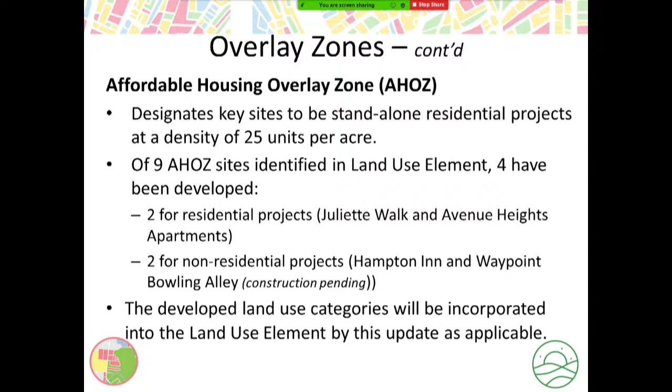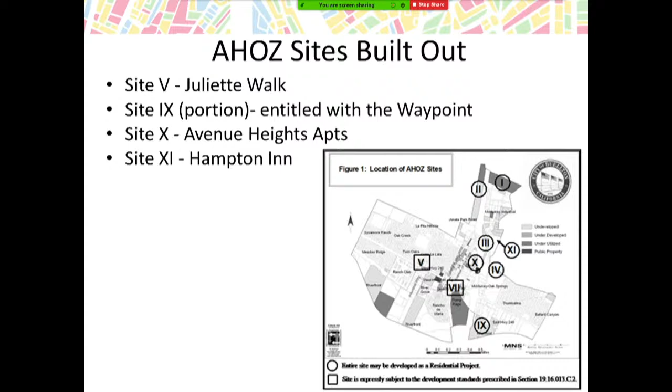Next slide, please. This is just a visual that shows where the AHOZ sites that were built out are, and where the others are throughout the city. And we can just move on to the next slide.

So we will be taking the existing land uses that are shown in the current land use element, updating them with all the items that I mentioned in the previous slides, and creating an updated existing conditions scenario, which will be the baseline scenario to use as part of this land use element update.

We will also be looking at 2 additional scenarios for the alternatives, for the environmental analysis and also for planning purposes. We will get into this in more detail later in the presentation, but I wanted to mention these scenarios so that when you hear us talking about scenario 1, scenario 2, scenario 3, you'll know what we're referring to.

So scenario 2, we will be looking at a 10-year build out. We will be looking at the desired uses we'd like to see during that period, any assumptions we're making on the densities that will be built out, and opportunities that exist for building out during that period of time.

And scenario 3 is actually what we're calling a circulation and land planning hybrid. It's an idea, partially a vision and partially a strategy for addressing some of the issues we're all very familiar with in the city, stemming a lot from traffic and circulation. We will be discussing that during the circulation element presentation.

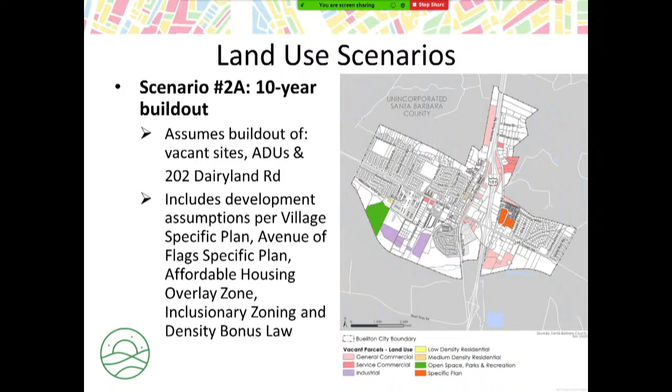So all of these considerations we felt were necessary in getting an accurate picture of the maximum development potential that could take place in order to plan adequately for circulation.

So in these next three slides, you'll see the vast majority of our vacant parcels are zoned general commercial, service commercial, or industrial, and then there's the Williamson property as well. There's approximately 114 acres of vacant land in the city.

On this slide, we see all the general commercial parcels, which make up 43% of the vacant parcels, shown in pink here. This zoning designation allows for commercial retail, wholesale, and office uses, as well as secondary residential and industrial mixed use. Most of these lots are AHOZ, as you see them labeled, meaning they could be developed entirely as residential.

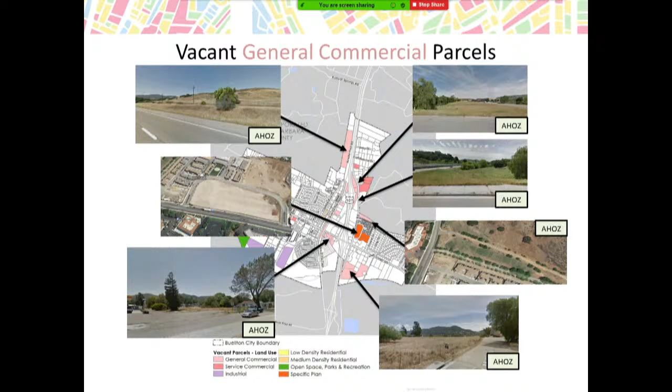The few vacant parcels that you see here zoned service commercial are in the darker pink, and this is about 11 acres. These could facilitate heavier commercial and light industrial uses, like furniture stores, car sales, ranch supply stores, and then again residential and industrial mixed use developments.

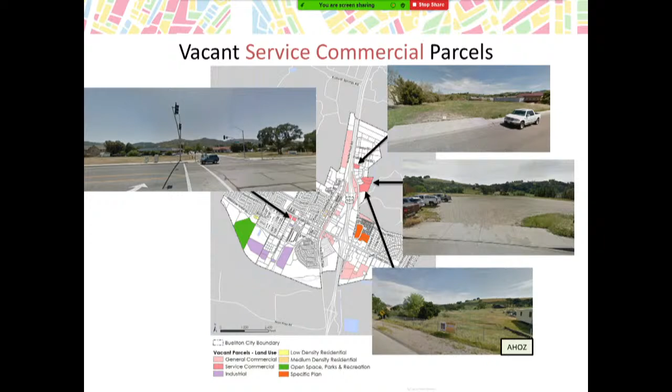Lastly, there are about 25 acres of vacant land zoned for industrial and manufacturing. These are all between the Williamson property and Rancho de Maria. Our mixed use ordinance also allows commercial and residential on these parcels to be mixed use secondary uses.

So from left to right, the large parcel to the south of the wastewater treatment plant is one of these, and the parcel approved for the Station, or the Network project. Next to that is the parcel approved for the Summerlin Wine Annex, formerly Terravant Annex. And then that large parcel was approved for the Buellton Hub project, but it may be important to note that the Station and the Hub properties have been put on hold by the applicant and are listed for sale.

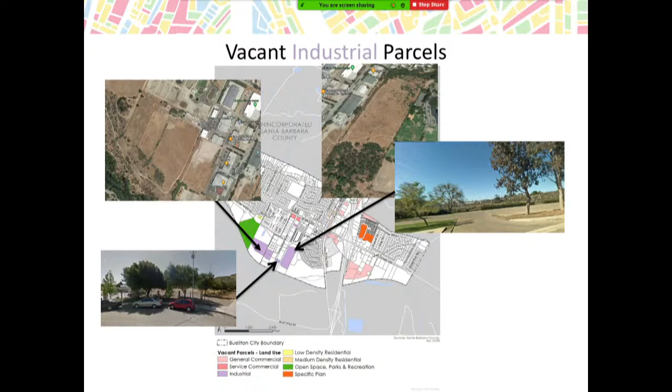So at this point, I will turn it over to Andrea to start us off for a policy discussion for the land use portion. Great, thank you, Kara.

So again, as was mentioned earlier in the presentation, the land use element will be a more focused update and will primarily consist of a technical update. A comprehensive update will occur in a few years when the city will undertake a comprehensive general plan update of all the general plan elements.

So as far as updating the focused update of the land use element and updating the policies and programs, we will be removing some policies that are no longer applicable.

Just to give some examples of that, as Irma mentioned earlier on in the presentation, the redevelopment agency has ceased operating since the last update. And so all of the references within the existing land use element to the redevelopment agency will be removed.

There are also some policies and programs in there that have been accomplished, so some achievements in terms of implementation of the land use element, and so some of those may be removed from the existing land use element. We will be modifying or updating existing policies and programs as appropriate.

As Irma touched on earlier in the presentation, we will be replacing references to, for instance, the Avenue of Flags Urban Design Plan with the Avenue of Flags Specific Plan, as that's the more current and relevant document to be working off of. We will also be updating and modifying some existing policies and programs to be consistent with current state housing law, and to correlate with the updated circulation element we are working on at the same time.

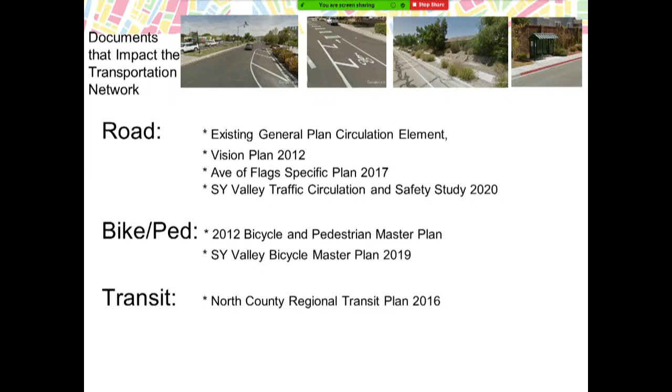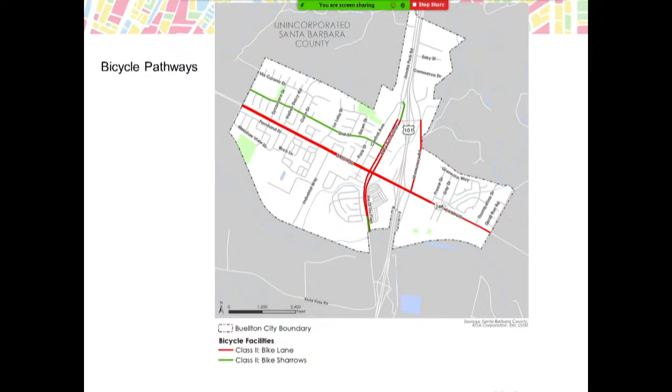So I just wanted to briefly provide some graphics. This one shows our existing bicycle pathways throughout town. We're starting to incorporate them, and we've fortunately been able to work with Caltrans to get the Class 1 and Class 2 bike lane on Highway 246.

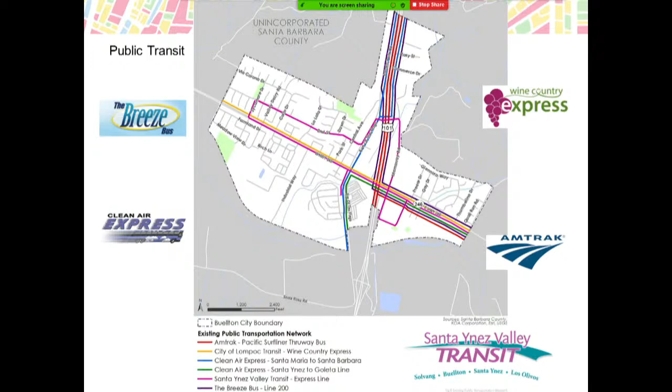Next slide. So what we are doing in this phase of the circulation element update is reviewing the existing conditions and providing an assessment of what we currently have.

Normally we would do new traffic counts at our critical intersections. Unfortunately, just because of the timing of this study, we had the COVID pandemic, and we weren't able to do new counts. So what we've been working with the consultant on is collecting all of the project traffic data counts that we have, any available counts from other sources, from Caltrans and SBCAG reports, any other traffic safety studies, development traffic studies, etcetera, to try to pull all of that data together as recently as possible.

We're also reviewing accident history, evaluating the type of accident that occurred and the causes in the actual accident reports. We're reviewing intersections and road segments for level of service, a performance evaluation we'll get into later. Right now level of service is what's commonly viewed as far as how well the streets are performing, but we're looking at different aspects because we have to go into VMT for review of future documents.

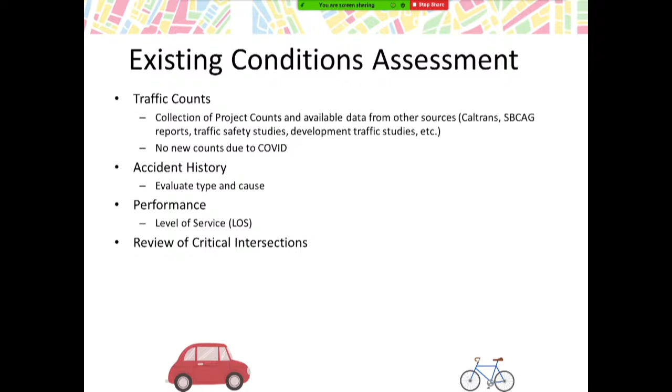And I mentioned we are reviewing a few of the critical intersections. Next slide. So the next few graphics show you a snapshot of the different existing conditions that have been reviewed. This one is the existing daily roadway segment traffic volumes. It gives you details as far as not just the total volumes for the intersection, but which direction the vehicles are turning.

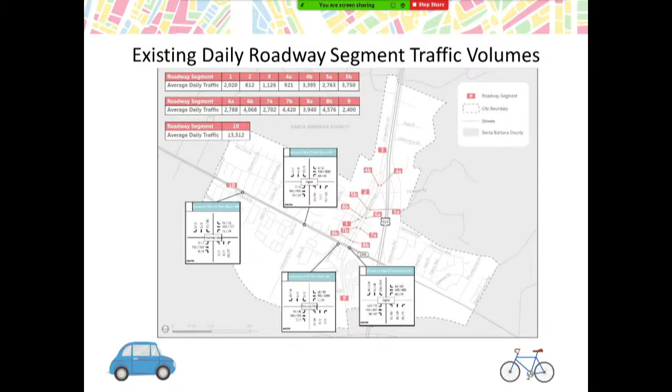Next slide. This is another one where we're evaluating our pedestrian or bicycle-involved collisions. If I zoom my screen here, you'll see the dots denote specific locations for those occurrences. Next slide.

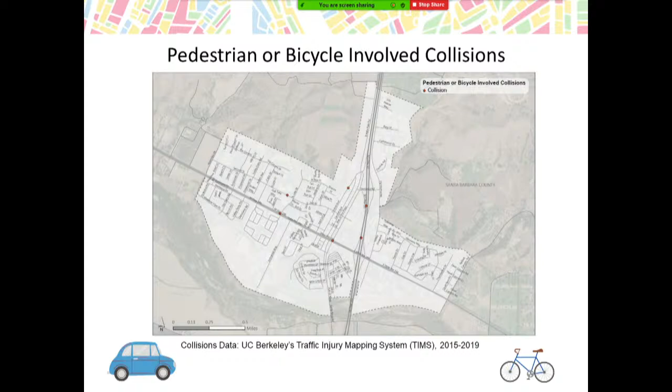The next one is the vehicle-only collisions, and I believe, Joe, correct me if I'm wrong, but these are vehicle-with-vehicle-only collisions. That's correct. And you'll see by the intensity of the color, the dark green is where there's been occurrences less frequently, but the brighter it gets through yellow and towards red is where there's a high occurrence of those vehicle-vehicle accidents.

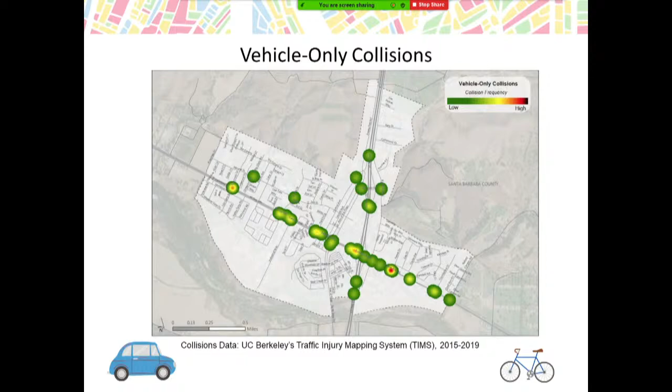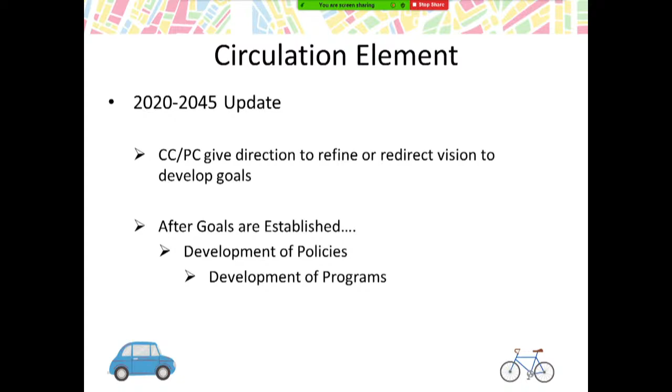We can probably- this isn't my slide yet. Right, no, we can move forward here. Yeah, that's fine. Okay, this is mine.

Well, thanks. I'm going to give a brief overview of the complete streets concept that's come up a few times in the conversation tonight. Complete streets is essentially finding a way to get better use out of your infrastructure in the city to create a healthier and more livable community, and make it easier to cross the street, walk, ride a bike, and address the mobility needs of everyone at any age, at any ability, for any type of trip, whether shopping, school, or recreation. Complete streets essentially makes Buellton a better place to live.

And there's lots of different ways to do this, and we have what we call a toolkit. So Claire, next slide please. With complete streets toolkits, there are many different tools in our bag of improvements that we can employ on Highway 246, for example, or Avenue of the Flags, or any other street in the city, that create a different kind of mobility environment. What I'm going to show you in the next series of slides are some of the types of tools we've employed in other communities in Southern California.

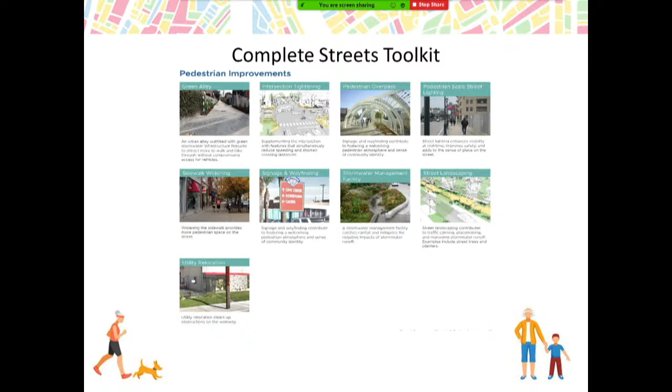There's also signage, wayfinding, and landscaping enhancements that increase walkability, increase the attractiveness of the street, and make it a more desirable place to walk and bike.

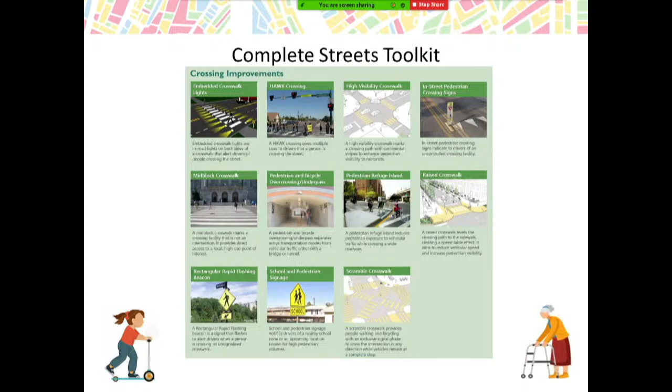There are, of course, bicycle improvements. You have a bike lane now on Highway 246, Class 2, and we'll talk about that in a little greater detail in a moment.

But there are other amenities that can be added to increase the attractiveness of cycling on the highway — maybe adding bike parking, or with signals, putting in bike signals to give priority to cyclists, especially down by the 101 interchange where there's a higher volume of traffic. You saw on the heat map of accidents a higher incidence of car accidents at that location, so something that increases safety, not only for bikes but for pedestrians.

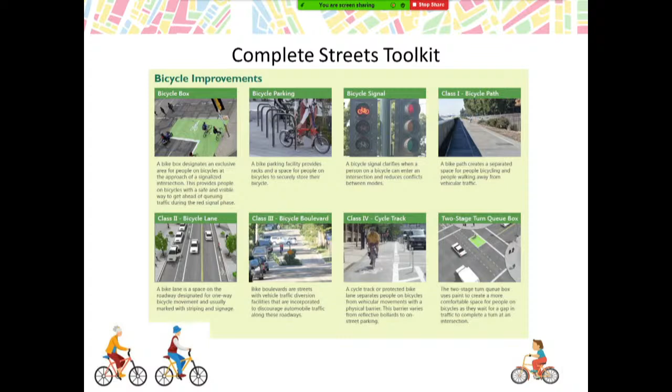And then there are different types of bike lane improvements that can be employed in the city, on the highway, and in other locations.

There are streetscape improvements, and streetscape is something that increases the attractiveness and livability of a street. If you're walking on a 4-lane highway, adding landscaping, parklets, benches, and maybe reclaiming some of the asphalt for parks and places to sit, making it greener, makes it more attractive, a friendlier place to walk and to exist, and more attractive to businesses wanting to locate there.

There's also stormwater management that can go along with the planning to recapture water, so it's a greener environment not relying all year round on irrigation, plus the addition of street furniture, benches and tables, places for people to sit and maybe just be outside and have a coffee or lunch or a sandwich. We talked earlier about street lighting, and in locations with utility poles and other obstructions, relocating them makes it a more pleasant environment.

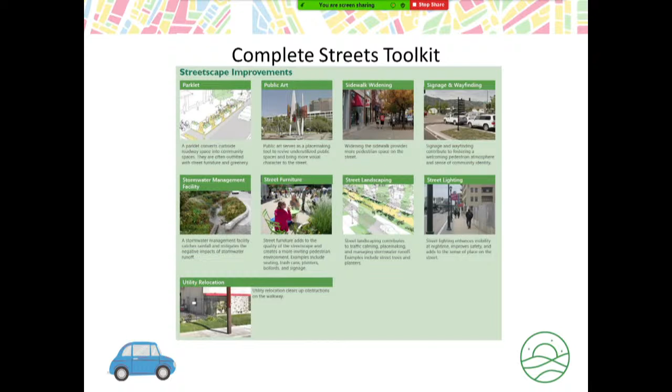And then, of course, there are other improvements for roadways, and maybe that's changing the use of parking, whether it's adding parking or taking parking out, or a combination of reducing lanes and maybe adding angled parking in locations, so all of the real estate is not just for through lanes, whether they're used or unused, the addition of landscape medians, or putting a street like Highway 246 on a road diet.

And by road diet, we mean taking out a lane or two. It's a 4-lane arterial. It's the volumes at 13,000 cars a day, or half the capacity of the road. So there's a lot of unused roadway asphalt there that could be repurposed, and that's a conversation if the city is so inclined, the community is so inclined to have with Caltrans, and push for that greener, less auto-oriented environment if you're so inclined. There are other traffic calming type devices, speed feedback signs, and in some places, not necessarily for Highway 246, improvements such as speed tables or speed cushions.

That can be employed on residential streets and other streets in the city, maybe 2nd Street, maybe Avenue of the Flags, or elsewhere. Again, these are just tools that are available to you. There are many others, traffic circles and other things that can be employed that change the dynamic and get people to change their driving habits.

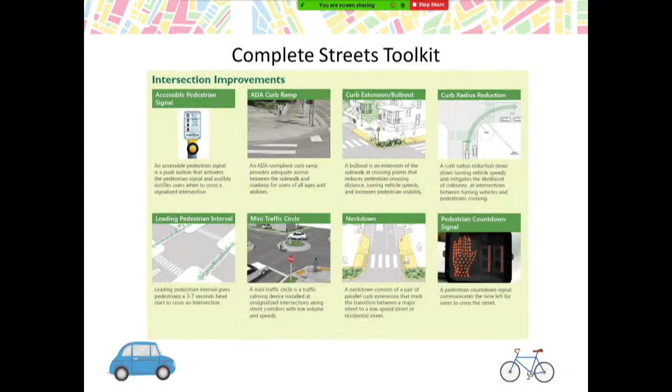And so this is just an exercise on Highway 246. It's a what-if exercise. What if you employed a complete streets environment on Highway 246? So we picked 4 locations in concert with staff to give you an idea of some changes you could make, and we kept it at the simplest level. No point in hitting it with a baseball bat yet.

This first location is just west of the interchange of Highway 246 and 101. In these series of slides, the top image shows you what the existing cross-section is. The cross-section means from curb to curb, how are the lanes used, and what is the right-of-way available. So we have an 80-foot wide roadway, and you can see it has a wide center two-way left turn median at 14 feet. It has 4 10-foot lanes, and it has narrow bike lanes on the street.

Then on the bottom, we took the idea of, well, what if we narrowed the center two-way left turn median? What if we used some of that real estate to put in a protected bike lane, a cycle track on the road? So we would have a buffered bike lane that makes it more inviting for cyclists to ride. So it gives a more inviting environment to walk and to bike.

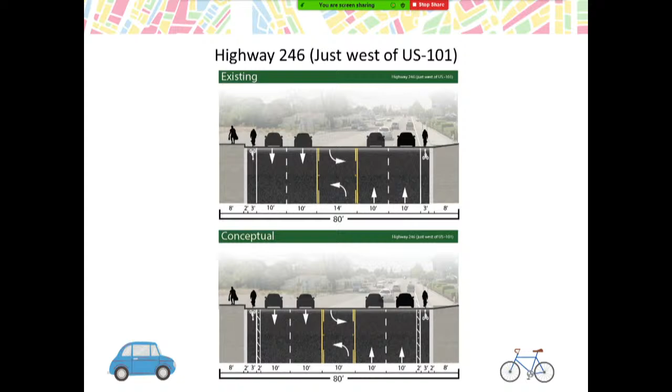And this would tie in nicely on the north side of Avenue of the Flags, where you have the bulb outs at the intersection. So it ties in nicely to a pedestrian crossing environment. And some of the tools I showed you earlier, such as bulb outs or curb extensions, would tie in nicely to a safer pedestrian crossing environment across the highway.

And that would work in conjunction with even considering a road diet for Highway 246 and working with Caltrans to eliminate 2 of the traffic lanes and just have parklets or street parking or angled parking or other treatments with the bike lane.

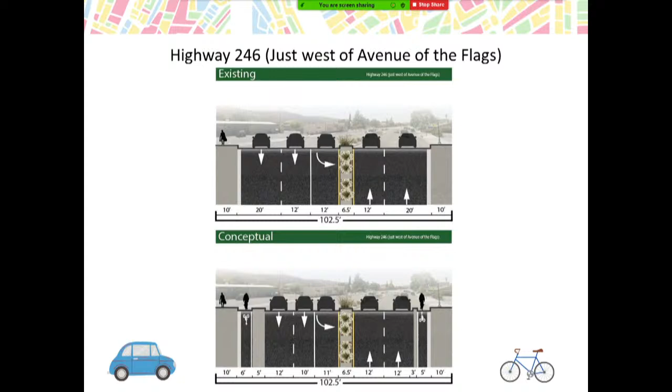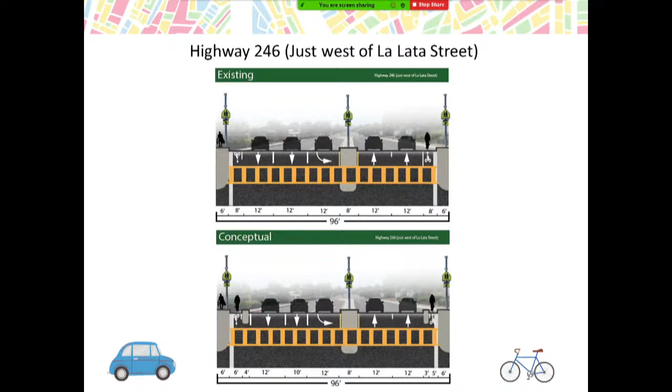And I should point out that in these figures, we've used Street View from Google to give you a sense of what the view looks like today and in the future, so you can see the cross-section tied in to these concepts. And then the final location is just to the west of Sycamore Drive.

The speed limit as you come off the highway to the west is 45 miles an hour, and it drops to just 35 as you approach La Lata. So it's understandable that there's concern about people speeding as they come into the city, and how do we get people to slow down and recognize they're not on a divided highway at this point.

So these were just some simple concepts because we wanted to give a flavor of some of the things you could do. There are certainly more dramatic improvements, such as taking out two of the lanes if you were so inclined, putting in more medians, bulb outs, parklets—just changing the dynamic of the street. That really makes it a friendlier and more desirable street.

It does cross the city. It's the heart of the city, along with Avenue of the Flags, and it's an important facility. So we want to give a flavor of what Complete Streets are about. It's going to be an important component of the circulation element update in the general plan.

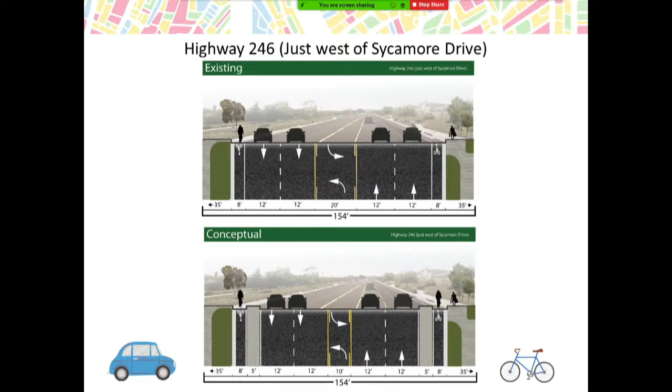So that is a general overview of where we're at with the circulation element update. As Scott mentioned earlier, we want to reevaluate the goals as we're doing a comprehensive update for this particular portion of the general plan. Once the goals are established, we want to review the policies, similar to the land use element portion. There are existing policies and programs in the current circulation element of the general plan. We'll be going through those.

A lot has been completed. Some have already been reviewed as infeasible—we've gone over some of these items. Some are no longer applicable. With new input from the community, making it more current to the studies recently completed and to the demographics and community we have today, we want to make this portion of the general plan relevant. So we'll be working on developing the goals, policies, and programs that will ensue.

This portion too will also need to address social equity and environmental justice, similar to the land use element. So everything is going to be reviewed in that fashion altogether. I won't go into more detail with that, as Andrea went into that pretty well earlier in the presentation.